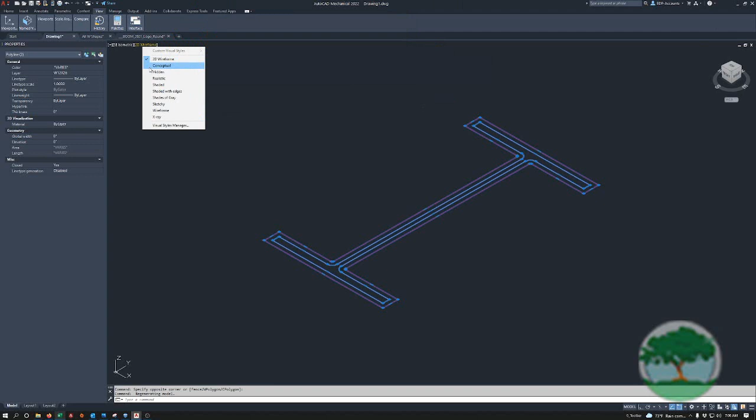To begin, we will be working in isometric views, so we'll select the items and select the bottom right hand corner of the view cube here. Next we're going to set the visual style to conceptual by using the drop down and selecting conceptual. You can see this turned our cross sections to multiple colors, and they correlate to the UCS you see down in the bottom left corner.

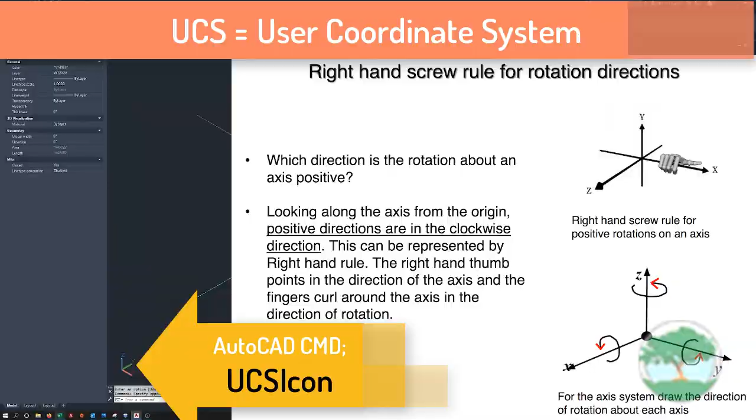Next, when we select things, you'll now see a gizmo, and that is the round item here. When you begin yours, it may be set to move, and this will allow you to move items in a single direction using the grip handles instead of the move command.

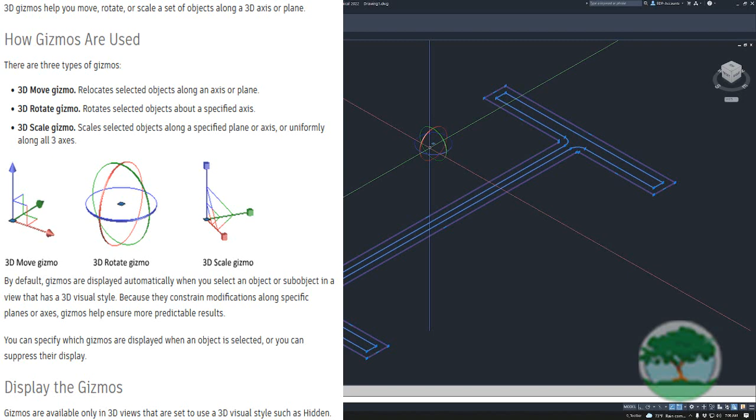For us, we're going to right click on there and click rotate, and then that square in the middle of the circles, we're going to drag that to the bottom corner of our I-beam.

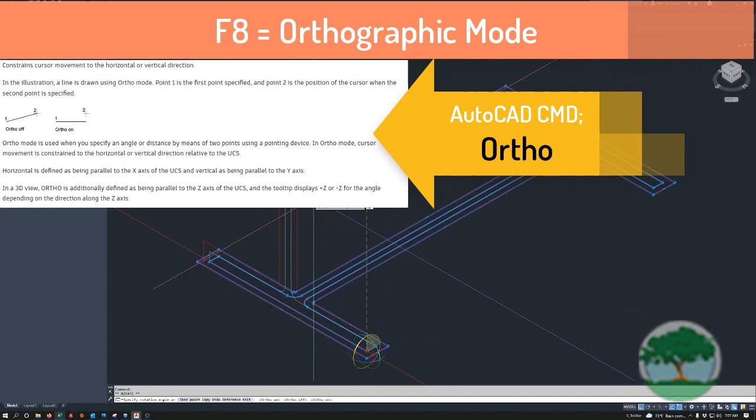Next we're going to use the circles here to rotate around the axis instead of using rotate 3D. So we can rotate, and you'll see without F8 on that you can rotate to any angle. With F8 on, it snaps to 90 degrees. So we'll just snap that there.

Next, we will simply issue the extrude command. It's a little 12-inch section. And next, we're going to put in a W8 by 21.

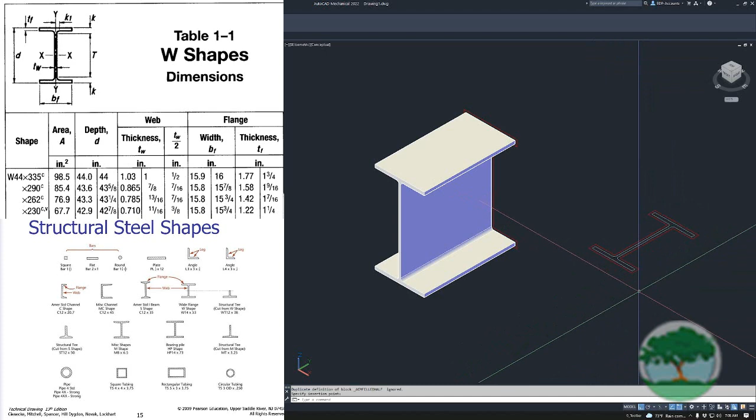We're going to want to do some similar things here. We're going to move the gizmo. If you see that you're editing the item, you can just hit escape. That will reset the gizmo.

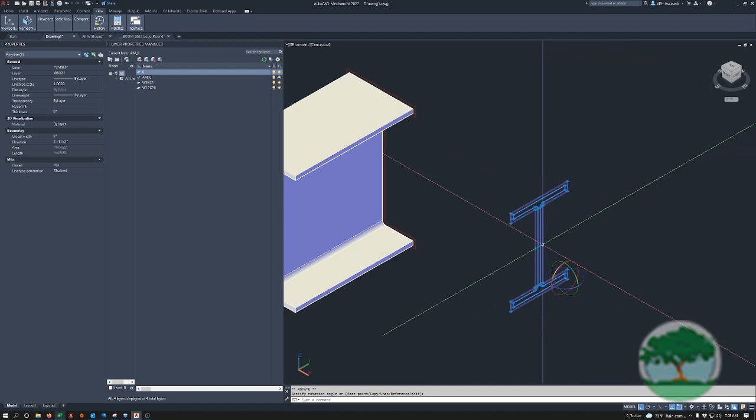Put it down there. We are going to stand this beam up, and this time we're also going to rotate it along the Z-axis 90 degrees. And we're going to extrude

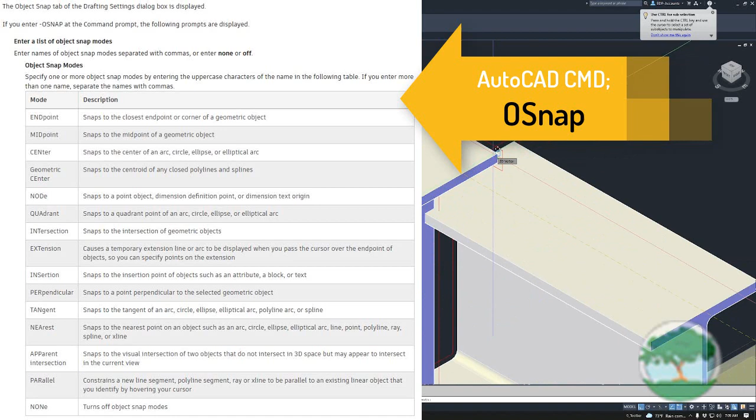a 12-inch piece. Now to move these, if we needed to put this beam 6 inches down the length of our original beam, we just move it from the center point to the end point there, and move it the 6 inches that we need.

However, you will see that this is not the way steel beams are connected. There is some coping involved.

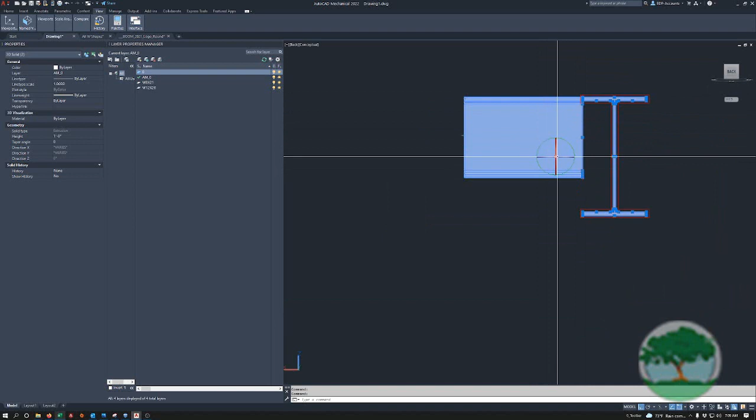So what we'll do, using the view cube as you saw, we will move to this view in the back, and we can simply measure from the web to the end of this other beam, and see that on the x-axis it's 3 1/8 inches. So we'll just move that 3 1/8 inch.

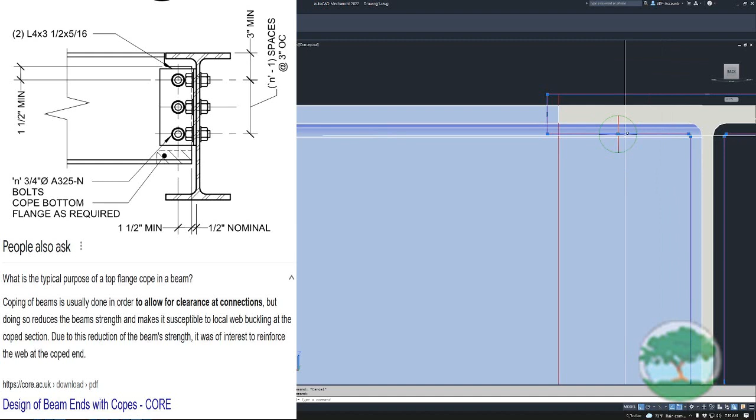Now looking at the side view, you will recognize this red line. Basically that is a cope cut, and this we are going to modify the cope cut just slightly. It's going to shift down 1/4 inch.

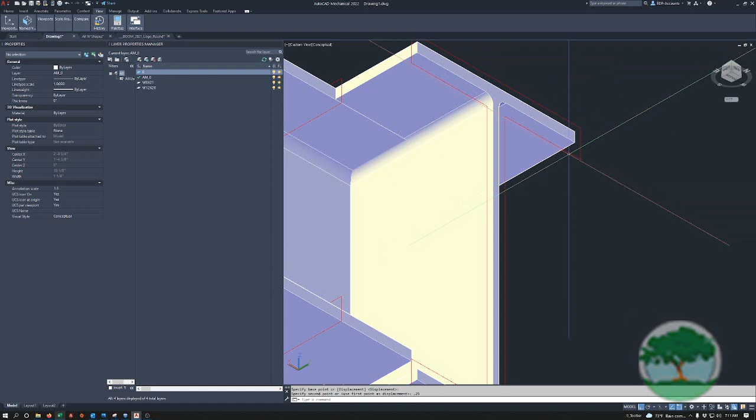And now we'll do the same thing as before and just extrude the red piece. The red piece is the cutting surface.

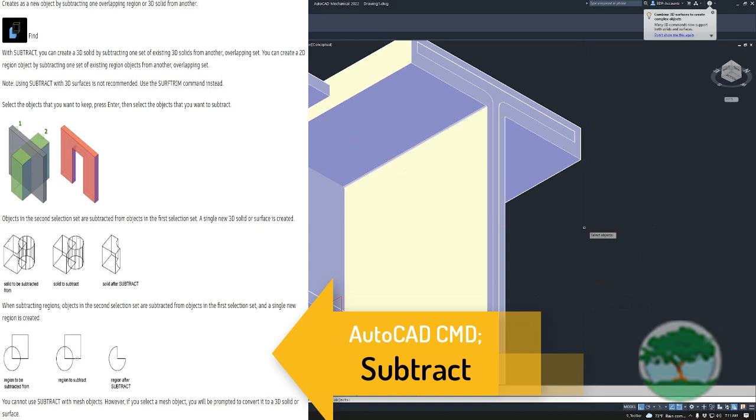And the next command we're going to use, it's called subtract. Issue the command subtract, and we want to subtract from this beam this coping cut. So we select the one beam, tell it OK. Now it's asking for the cutting item, so we select that, and now we have a cope cut beam here at the end.

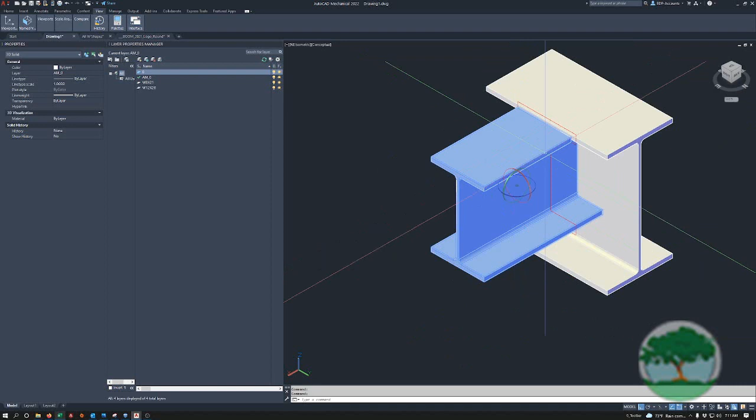And this is how these are actually connected.

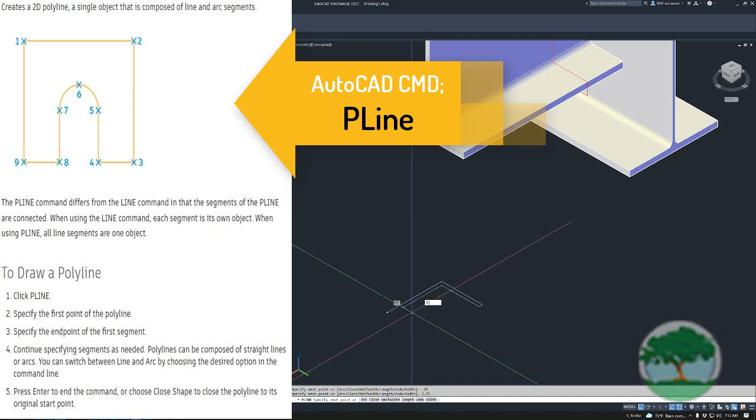Next, we will make an angle clip out of an L 4x3. So let's draw 4x3, make it a 1/4 inch. But we'll make this clip about 6 inches long.

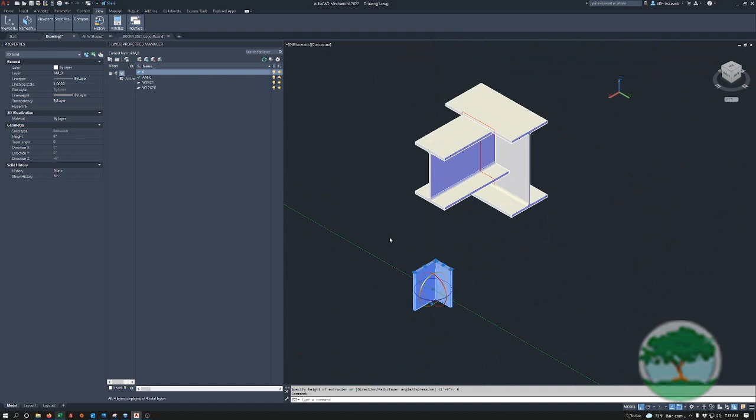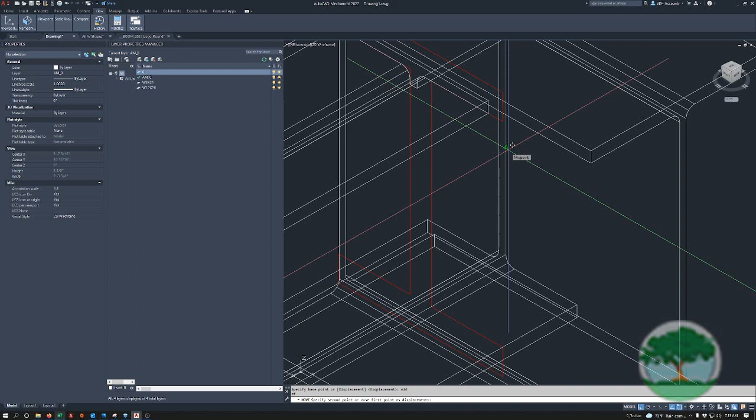On this, we're going to want to move to a 2D wireframe view. So we're going to want to move this clip from the middle point of its back face. And we're going to put it in the middle of this cope cut here. And let me turn back on Conceptual.

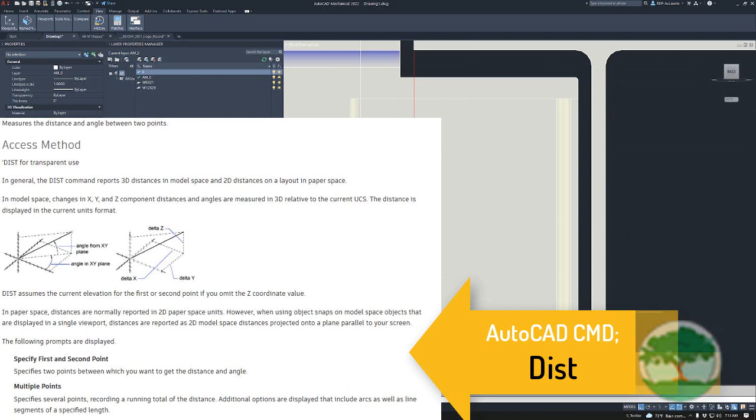Let's see that we need to move it just a little bit. So we can just measure one edge to the other edge here. In the x-axis, we need to go 1/4 inch. So back in the 3D view, we can simply move it 0.25.

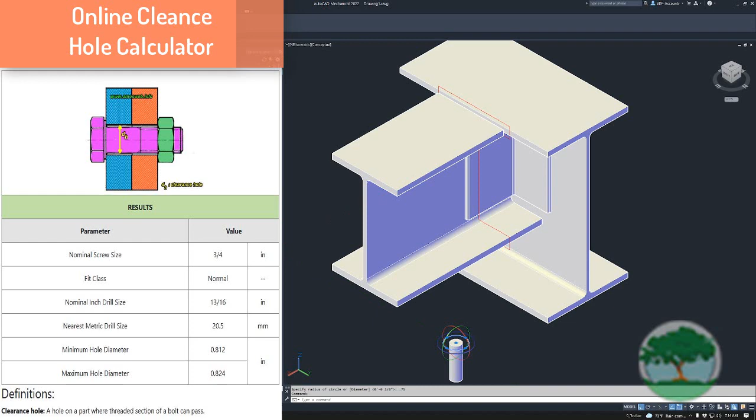Next, if we want to put some bolts in there, say we're going to put a 3/4 inch diameter bolt in there. We would want to draw a circle with a diameter 13/16, and that's 1/16 larger than the bolt is.

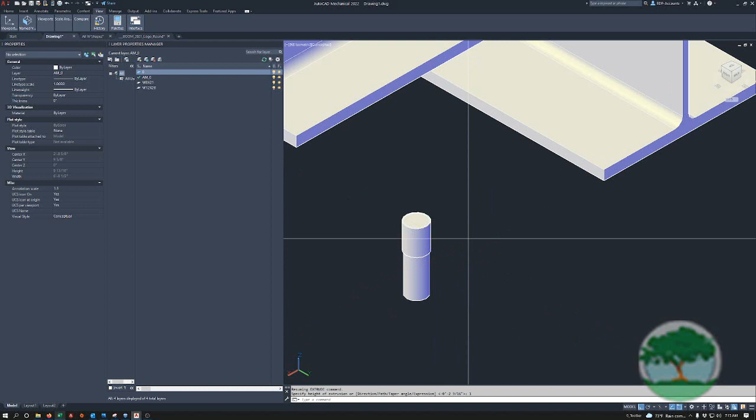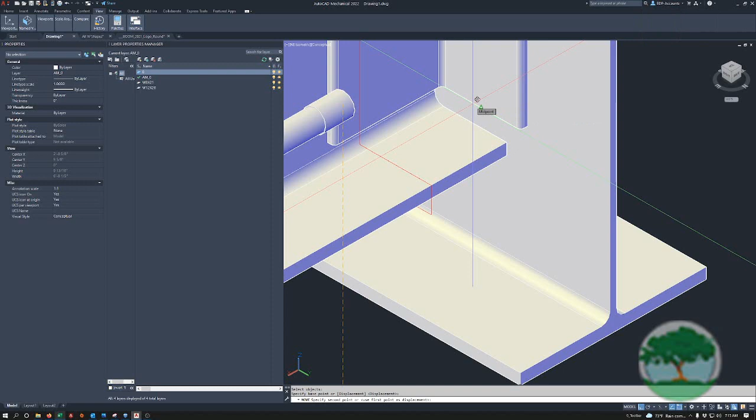Extrude that also, extrude it 1 inch. And once again, we'll be using the gizmo to rotate, and we're going to want this to rotate on the y-axis, 90 degrees there. And we're going to put these bolt holes from the center point of those, and we're going to put them on the middle point of the flange of the angle clip.

And we're going to move them in 1 inch. We will make a copy. Okay, we will put more than one hole in there.

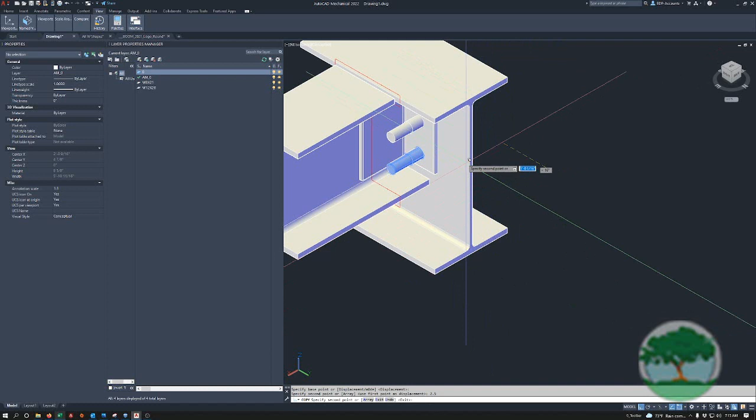Let's just look over here in this direction. And if you're in this direction and you want to move things in this direction, you'll see that the UCS is X and Y, and you will not be able to move things up in the Z axis.

So a new command, UCS. You have several options. We're going to select View, and that now makes these axes X and Y. So we can move this.

And lastly, we will set the depth through the web. We'll actually need 2 copies of these hole makers. Just copy from one point right back to that point.

Next we will subtract one at a time. I-beam, we're going to subtract the holes. Angle clip, we're going to subtract the holes.

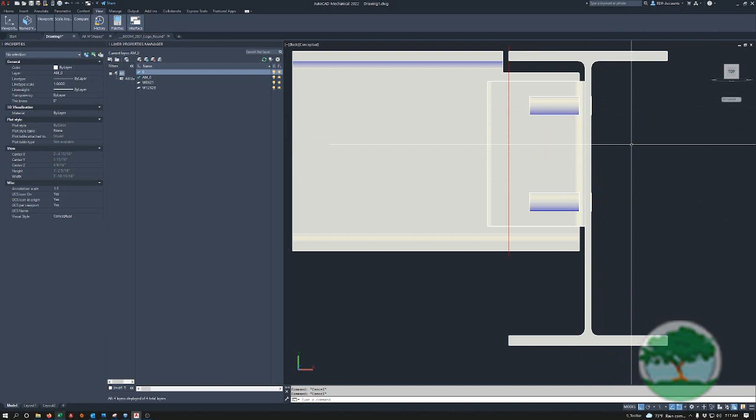And the next command we're going to learn is 3D orbit, 3DO. We'll want to select an item for us to orbit around first, and then we can do 3DO. You can see we've made those holes quite nicely, and they indeed have gone through the web of the beam also.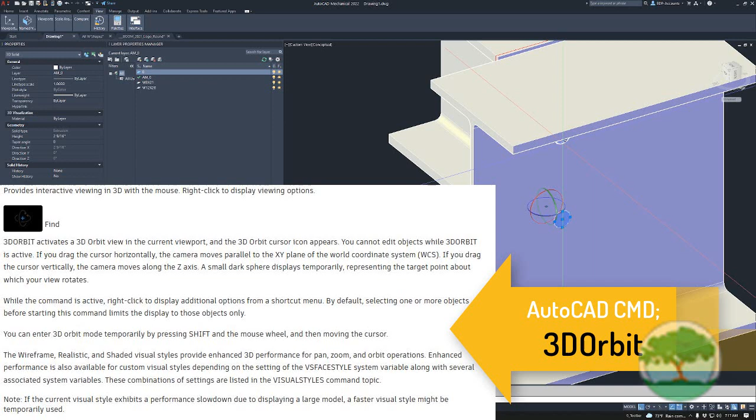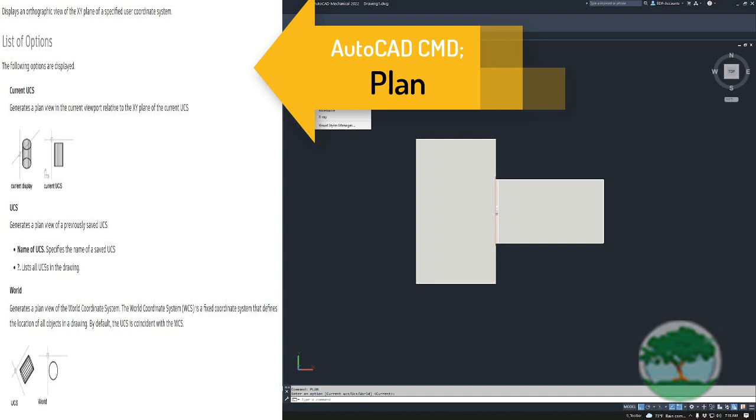To get the UCS back to normal, we will just type UCS, W for world, and then we will type plan. This will return us to the plan view, the top-down view. Now if we go to a 2D view, you can see what you would normally see in a 2D platform drawing. Profile views are done, your elevation views are done.